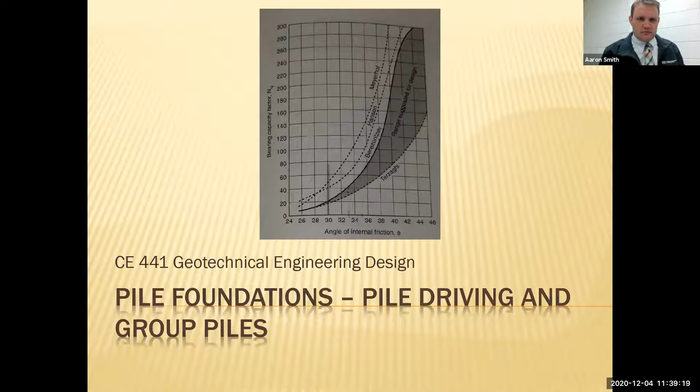So we've been talking a lot about how to figure out the bearing capacity, and hopefully bearing capacity of piles reminds you of chapter 3 when we talked about Terzaghi. Actually, let me stop this. Oh, look at this equation right here.

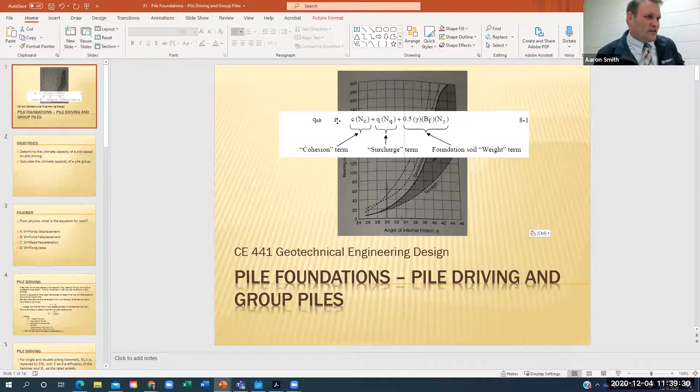Can you guys see this equation right here? Get that. This is one of my favorite equations. This is like from the father of soil mechanics. If you're going into geotechnical engineering, this should be your favorite equation. It tells you how much soil can bear, how much it can hold. It's made of 3 terms. It's Terzaghi's bearing capacity equation. It has a cohesion term, a surcharge term, and a foundation soil weight term. And each term, C is cohesion, but then each of these, N sub C, N sub Q, N gamma, everyone decided after Terzaghi invented this to add their own. So there's tables, there's ways, and you can figure this out. If you're just dealing with sand, of course, the cohesion term goes away.

BF, that's kind of the footing width. When it comes to piles, we use this equation, but we don't use all 3 components of it. If we're in sand, we knock out the cohesion component. And because the base of our footing is so tiny, it's just the diameter of the shaft, maybe 1 foot, maybe 2 foot. You can go up to 10 feet, but that's a big pile. We ignore this component, so essentially it's just Q, the surcharge, times some modification factor. And surcharge, again, that's just the unit weight of the soil times how deep it is into the ground. So the deeper you go in the ground, the more that soil's pressed together, it's tighter, and it can hold more load just because it's deep in the ground.

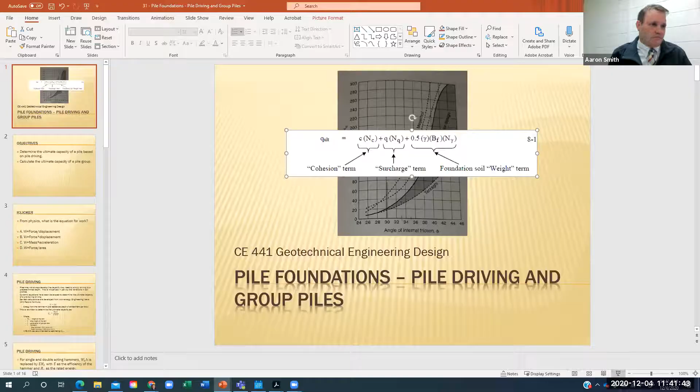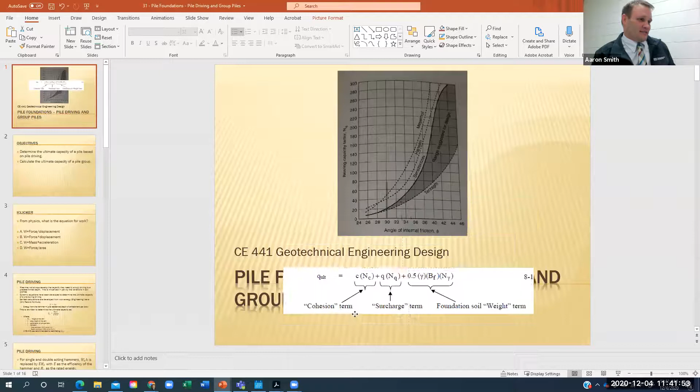Okay. Oh, dang, I covered the picture I really wanted to show. This. Okay, we've been talking about bearing capacity of piles, skin friction of piles. I just wanted to show this table right here because I found it was a good summary. Last time we talked about 12 different ways to calculate skin friction and 5 different ways to calculate bearing capacity of a pile. And here was just kind of a good summary.

If you're trying to find this NQ, the surcharge factor, here's a couple different authors, Meyerhof, Hansen, who knows how to pronounce that, Terzaghi. You just start with this table, you know the soil friction angle, and then you pop up, and then you come over and figure out this NQ factor. And who do you use? I don't know, but here's a good range. This is a range suggested for design. If you're a good engineer, you probably will not pop outside of this range.

So while there are many authors who have suggested these bearing capacity factors, if you stay within this range, if your N sub Q factors, based on your friction angle, stay right around these ranges, you'll be safe. Anyway, just wanted to share that with you.

There's more foundation books than the one we're sharing. There's probably 10 different foundation books. I was talking to my buddy who was working on his PhD at Virginia Tech, and I said, share me your notes about soil foundation. He had his book and his notes, and I was reading that, and none of his equations match the equations in our book.

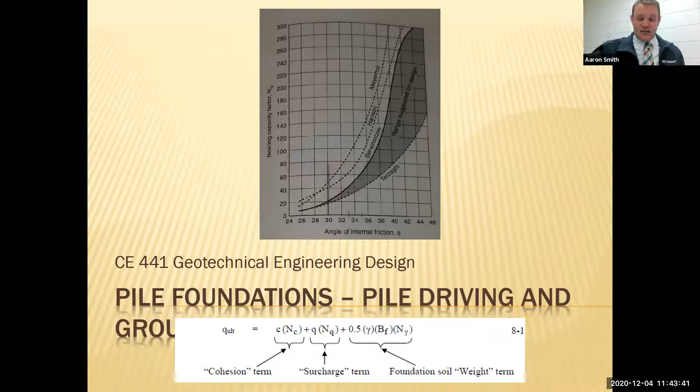He abridged all these plates. He had so many plates, and he had to choose the best. He saw our day, and then he picked the best pieces that would match the times that we were going to deal with. And Moroni and Mormon, they abridged all the plates. Well, that's what all these different authors do. Das, he abridged, and he found his favorite equations for calculating pile capacities or whatever. And then another book, he'll pull in his favorites. Anyway, there's lots out there. That's the whole point. But what doesn't change is the theory.

So the theory behind bearing capacity follows Terzaghi's equation. And what's the theory behind skin friction capacity of a pile? What are the three components that make that up? Who knows? Garrett, I'm calling on you out of the blue. Skin friction, what do you need to know to figure out skin friction? There's three general things you need to understand, two about the pile, one about the soil. What are they? There's the perimeter of the pile. Yep, got to know the perimeter. Length, the length of the pile.

And then, friction factor. Boom, friction factor. So that's the theory. You need to understand that. Now, friction factor, there's a million ways to figure that out.

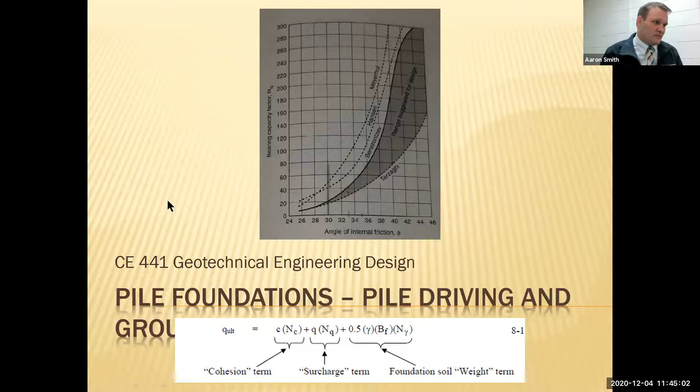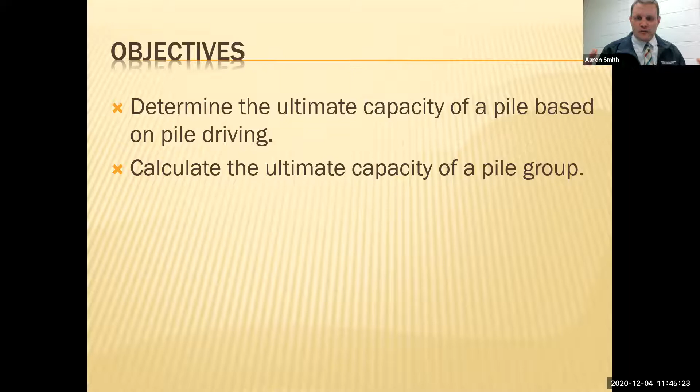And the site condition you're in can help you figure that out, and you may not know. So what you may need to do is go out into the field and investigate this with a test pile or something like that. So today we're going to talk a little bit more about how you can go out into the field and calculate the capacity of a pile based on in-field pile driving conditions. And we're going to talk about what happens when you have multiple piles and how you have a group, what's going on.

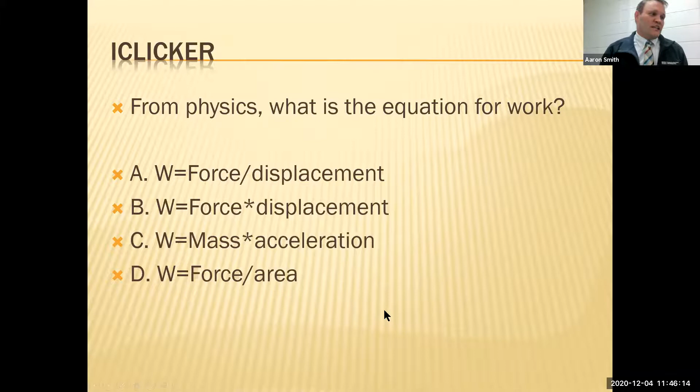That is correct. Work is force times displacement. So if you're a hammer and you hit a nail, the force of the hammer drives the nail in a certain distance. Well, good geotechnical engineers took this same concept out into the field, and they thought, if you're driving a pile in the ground, that's like work. That's like hitting a nail with a hammer. We could calculate how much work, and maybe we can back calculate work into some ultimate bearing capacity of the pile.

So if you're not comfortable using all these equations in the book, calculating your ultimate bearing capacity of your pile based off skin friction and end friction, what could you do? Well, you can go out in the field. And sometimes your calculations say, okay, I need to drive this pile 46 feet and it will be just right. But sometimes when you get to 46 feet, you don't have the capacity.

For whatever reason, your soil conditions were not what you thought they were. They may have changed, or you may not have had enough laboratory tests to adequately characterize or classify the soil conditions. Anyway, you're at a depth of 46 feet, but you don't have capacity. It's just going in the ground, acting too soft. So they wanted a method out there: if you got to the depth you thought you needed, but weren't seeing the kinds of blow counts, or it's still driving in too easily, you could keep driving the pile and weld onto it until you got to a depth where it was so dense it was barely being driven into the ground by the hammer.

And so there are equations that have been developed to determine the ultimate capacity of a pile during driving. So no calculations, this is purely field observations. ENR, Engineering News Record, has a formula, and it's all based on the work formula. This should look familiar: work equals force times distance. They kind of said energy from the hammer equals pile resistance times depth of embedment. So they modified this equation a bit more and said the ultimate capacity of a pile equals the weight of that huge ram times how many feet it's dropping, divided by the penetration per blow.

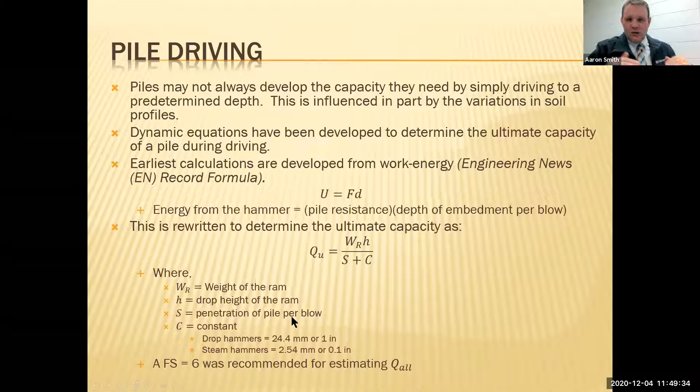But anyway, after all that's done, you can apply this whopping factor of safety of 6 to your Q ultimate, and that will be your Q allowable. So when you start seeing factors of safety of 6, that tells you engineers are doing what the military calls rear guard action — they're protecting themselves from future litigation. So factor of safety of 6 is what you divide this by. But you're able to now figure out penetration per blow, and you can rearrange this equation even more.

And anyway, this formula has been modified many times, but it's all kind of based on that formula of work.

So what it allows you to do is, and I've done this before, one of my first jobs as an EIT was to go out in the field. We were working by the Salt Lake City airport, which was based on old ancient Lake Bonneville.

So my job was to go out there and watch these 50 to 60 foot piles get driven into the ground, recording on a log how many blows it took to go each foot. At the top, one blow went like 1 or 2 feet. I was like, whoa, this is tough. As soon as it started getting deeper, it was taking like 50 blows to go a foot.

So we were getting some really dense sands down there. Then we said, okay, you can cut it off. The engineers had come up with bearing capacity equations and said, if you're at this many blows per foot, you can stop. That pile has adequate bearing capacity to go on to the next one.

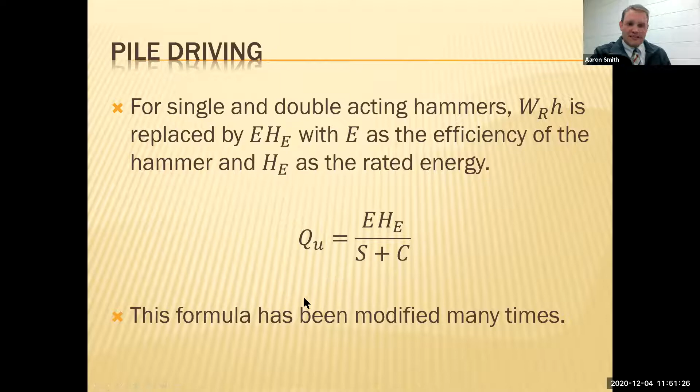So we did dozens of these. There were so many piles, they drove them all into the ground. There's formulas we can use based on the field data to know we've hit an adequate depth, we've got the bearing capacity we need, solely based off of the blow counts. But you need a couple pieces of information like about the hammer, the drop height, the weight, things like that. So there's a bunch of formulas to figure out this ultimate capacity.

So here's that equation we talked about, the modified Engineering News Record formula. There's the Danish formula, there's another formula, Janbu. Anyway, there's lots of formulas. That's just geotechnical engineering formula for you. But let's just look at this formula and break it apart right here.

It's saying the ultimate bearing capacity of a pile is equivalent to the hammer efficiency, and then WR times H, that is the weight of the hammer times the height that it's being dropped, divided by, we already talked about that.

We already talked about S is the blow counts, and the average penetration per blow count can be written related to the number of hammer blows per inch. So S, another way to write S is just 1 over N, the number of blows it takes to go 1 inch. And that's what C is, that modification factor.

Oh, here it is. You use 0.1 if the units are in inches, and then you use 2.54 if the units are in SI.

Okay, so then these are some new components to it. WR, that's the weight of your hammer. N squared, that's a coefficient of restitution between the ram and the pile cap.

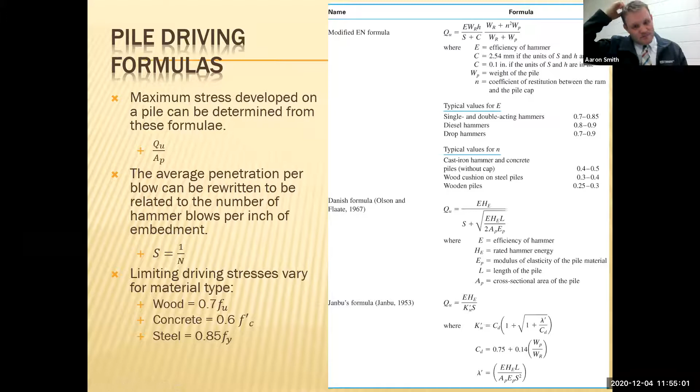And then they send an EIT out into the field. So that may be one of your first jobs, to count and verify that these piles have reached capacity. So not only was I counting blows, I was checking to make sure the piles were the correct batter, that they weren't tilted or leaning too much, and making sure they were practicing good welding techniques as they welded on the next branch of steel. Anyway, this is a neat way to do that. Any questions about this new way to figure out bearing capacity of piles?

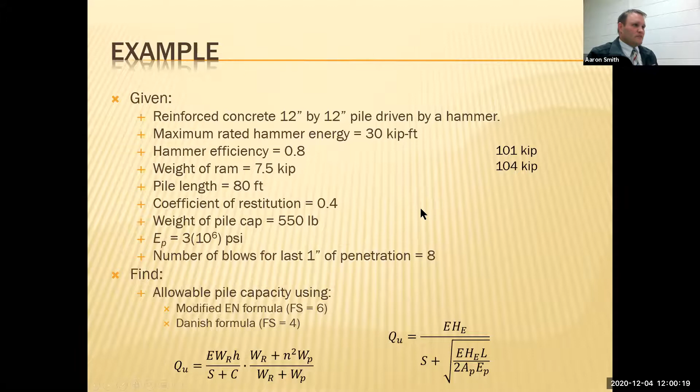So this is neat. All right, so the next question is, how else can you drive piles in the ground?

Well, you can vibrate piles in the ground, and so the amplitude can be calculated. They have these two weights that are rotating that cause the vibration. They're unbalanced, so it causes massive vibration depending on how fast they're being rotated. Then you increase the size or the static weight on these two eccentrically rotating wheels, and that creates the force of vibration.

So not only can you calculate the ultimate bearing capacity based on pounding a pile into the ground, you can also do it based on vibrations. But this is more used over in Asia or Europe, not very popular in the US. Why? Because there's not as clear an understanding of the relationship between load, rate of penetration, and bearing capacity when things are vibrating. You just don't get that same good feel.

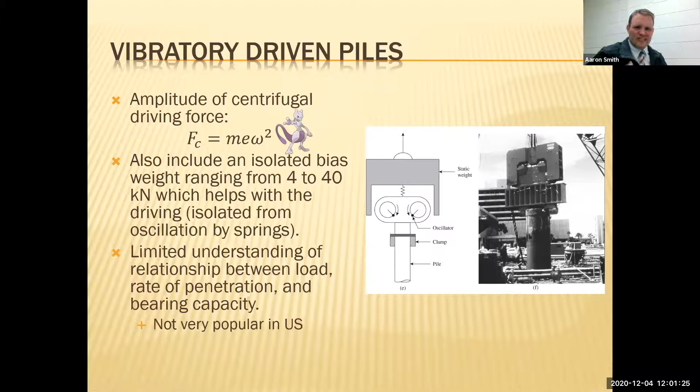However, there's an equation - if you have a vibratory type hammer, you can calculate the ultimate bearing capacity, but we're not going to really get into that. I just want you to know this is available as well. So if you don't have access to a diesel driving hammer and only have vibration, you can figure it out as well.

And of course, there are different folks who come up with different equations, like always.

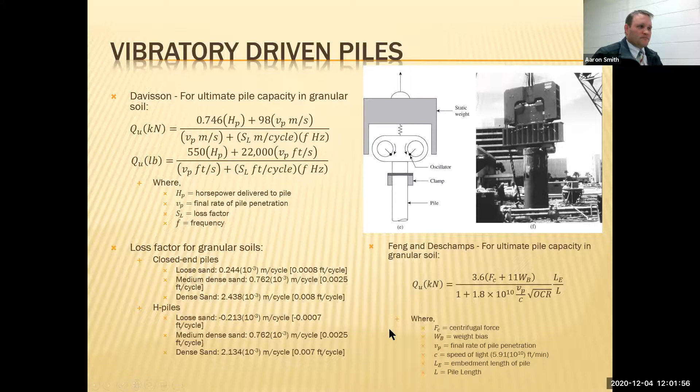All right, but this is where I do want to focus - this is going to be on the PE test for sure. You're going to have a question that asks you, okay, you know how one pile behaves. Maybe you can figure out the ultimate bearing capacity of one pile based on skin friction, bearing capacity, or blow counts. You'll probably have this depending on what test you take. I took the geotechnical PE exam, and it was focused heavily on questions like this.

So what happens when you have groups of piles, and how does that change the soil underneath? Does one pile, as you drive it into the ground, influence the second pile, influence the third pile? What if you had a group of nine piles, 3 by 3 by 3, and you drove the first pile in, second pile in, third pile in? What's going on in the ground right here? We know that when you drive one pile in the ground, it has a zone of influence that goes around it, and this picture explains it.

But when you drive a second pile in, sometimes those zones of influence overlap, and that could either be good or bad. It could be good if that zone of influence is densifying the soil. Say you had a loose sand, and as you were banging that pile into the ground, it densified the soil around it as it was displacing soil. Then when you put the second pile in, it densified that overlap area even more than the first pile.

Well, how could it be bad? What if you were in clay, and as you were pushing this in through clay, it was stressing that clay out? We all know that when you push on clay too much, at some point it's going to shear and slip along this sliding plane.

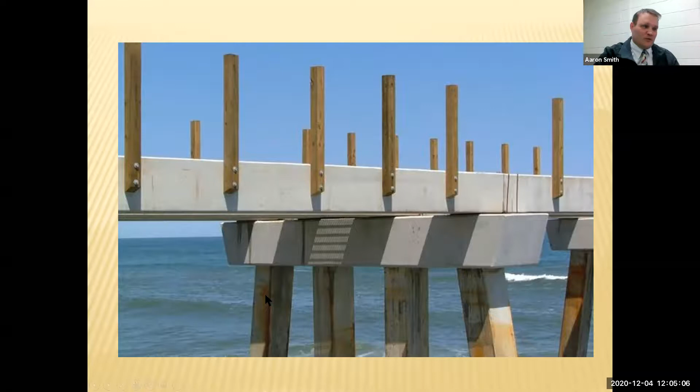Going back to this, the load bearing capacity when you have groups of piles is kind of complicated—people don't understand how it helps or hurts sometimes. A lot of research at BYU from the professor who teaches the foundations class there, Kyle Rollins, studies group pile capacities quite a bit. He's granted access to these huge diesel hammers and conducts experiments—he puts little pile groups together, then presses on them with giant hydraulic rams until failure. I just think that's really interesting.

So stresses carried from each pile to the soil will overlap when the piles are closely spaced. This could help or hurt depending on the soil conditions and how close you have these piles spaced. Your group of piles is notated as N1 by N2—in this case it would be 3 by 3, so N1 would be 3, N2 would be 3. If you see these values in an equation, that's what it is. L2 or LG is the total length of the pile, and BG is the total width of the pile.

And if you ever have an uneven number of rows and columns, say you had four columns and 3 rows, well then it would be 4 by 3. What one's L and what one's B? L is always the longer one. So in this case, L would be the length of all 4 of those spaced out, and BG would be the length of the 3 rows. We'll see these kinds of notations in a minute—I just want to make sure that's clear.

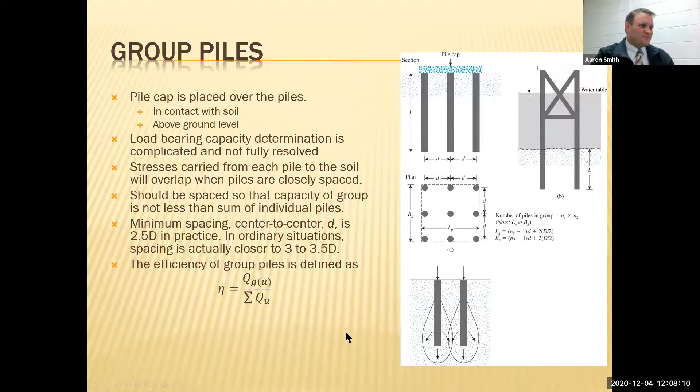We can figure out this value right here, which represents the efficiency of a group of piles. So we can calculate what that efficiency is with this kind of complicated equation, but it's not too complicated. Use those values that we just talked about.

N1 is just the number of piles that you have. In this case, it would be 3. N2 would also be 3. And you can figure out the efficiency of your pile. P, we know what P is - that's the perimeter. L is the length. F, that's friction, we've talked about that before.

Groups of piles, they can help you, they can hurt you. So how do we figure this out? Well, the approach is a 2-step approach. We first have to look at it as a giant block, and then we have to look at it individually, and then take the lowest value of those two.

So when it comes to group piles, the first thing you look at is like one solid giant pile that has a perimeter of BG and LG, and you calculate it as one huge pile. What if that pile was just one giant pile? What would its ultimate bearing capacity be?

And we're just talking about friction piles here. When it comes to friction piles, you just have those 3 components that we talked about earlier. When I picked on, I think it was Garrett, he said friction piles - it's the perimeter, it's the length, and it's the friction between all of those. That's all you need to know.

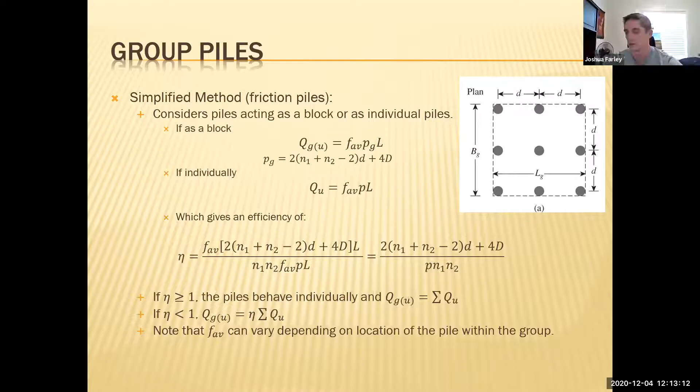But how many soil types could the skin friction be going through? As many as there are. You could have 2 layers, you could have 20 layers. So one thing to remember about these equations is when you're trying to sum up this F average, if you have multiple different layers of soil and each soil has a different friction between that steel or that concrete pile that you're putting in the ground, you need to sum them up individually. That's just one important thing to remember.

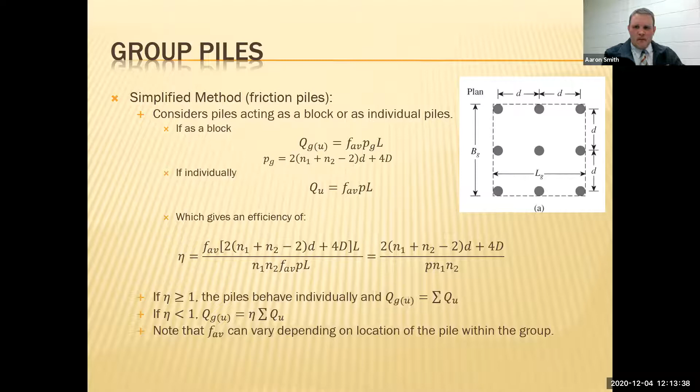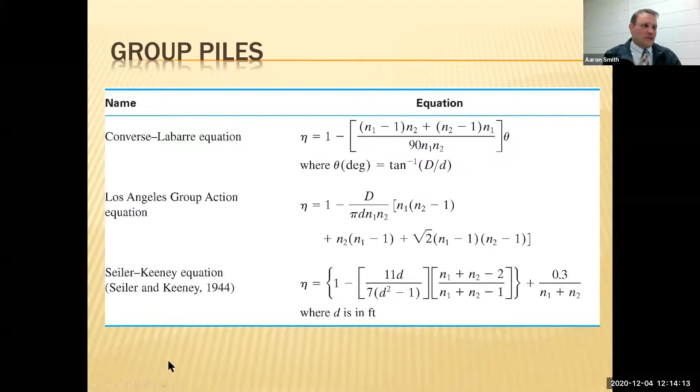So there's a couple different equations to figure out if your piles are efficient or not. The only thing to know is if this pops up on the PE test or in industry when you're working, there's just multiple equations for everything. I'm just showing you these so you know there's not just one set way to figure out efficiency, but they're all based off pretty much the same things. How many piles do you have? How many columns, how many rows, and you can figure out the efficiency of the group or not.

And when it comes to clay, who remembers Meyerhof's bearing capacity in clay? We talked about it last class. Does anyone remember that off the top of their head? Wasn't it 9 times the area of the perimeter times the cohesion? Close. Speak up, Brandon. Wasn't it 9 times the area of the perimeter times the cohesion? Yeah, that's right. So we're talking about bearing capacity. It's 9 times the area times the cohesion of the clay.

So when you're in clay, you can calculate the bearing capacity based off of Terzaghi's equations, but Meyerhof simplified it for us. When you're in clay, you could have QP equivalent to 9 times the area times CU. And so the ultimate capacity of a group of piles is you take how many you have. In this case, we have 5 times 3, we have 15 piles, and they each have the ability to hold some load at their base, at the bearing end, tip, and then they have some skin friction. So the ultimate of that whole group is going to be equivalent to N1 times N2, which is 15 times 9 times the area times the cohesion of that clay, and then it's going to be the sum of all the different layers of soil that we have.

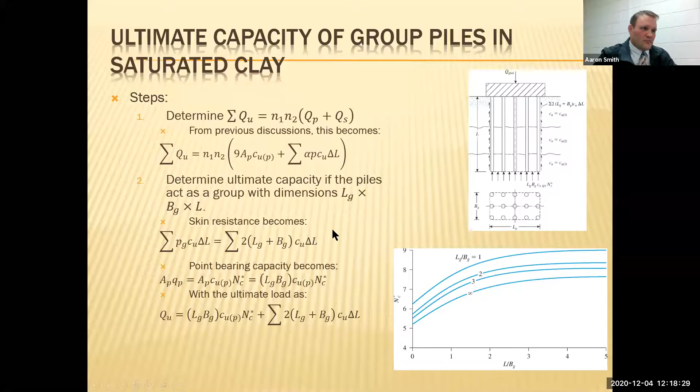And then it has a certain bearing capacity. That equation we showed at the very beginning, Terzaghi's equation for bearing capacity, had a bearing capacity factor of N sub C in it. So there are some charts we can use to figure that out.

If we know our length to base ratio, LG divided by BG, we come in here. In this case it's probably like 1.5. We choose which ratio line to come up to, find that same line, 1.5, L over BG, come up and over, and our N sub C factor would be somewhere around 7.5 or so. So there's 2 steps.

You have groups of piles. First figure out how much load the 12 piles could hold. Then figure out how much, if this was one gigantic pile, that skin friction would hold up with this giant perimeter. And how much that load being transferred down to this layer right here would be your bearing capacity for tip resistance.

You compare those two to each other, and see which one is lower, and that's the one you use. So group piles, 2-step process. Any questions about that so far?

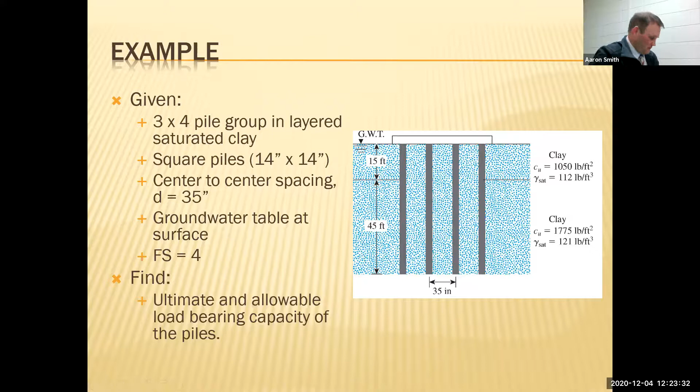How many equations are in chapter 11? I'm just curious. It's up to 131. I don't think I've ever had a chapter in my school career that had 131 equations in it. So that will be your challenge on the test - as soon as you see a question, you're just like, which one of the 131 equations do I use? But the good news is the questions will guide you to what to use. If it's in clay, that gets rid of half the equations, because half are for clay and half are for sand.

I'm just looking at the book, trying to point out anything that jumps out at me that's not straightforward, because equation 11.121 labels everything - it has N1, N2. We pretty much cover everything, there's nothing new that will jump out at you. You should be able to, when given an example like this, find it quite straightforward.

Something I don't know, because I already started working on the homework - where do you find the equations for LG and BG? Okay, so LG and BG, let's go look at that.

Okay, so LG and BG - L is going to be the length to the bottom of the pile. So in the problem we were on, L would be 45 feet plus 15 feet, so that's 60 feet. But LG is the length of the piles spaced all out. So LG would equal, in this problem, 4 times 35 inches, because that's the space between each one. Does that make sense?

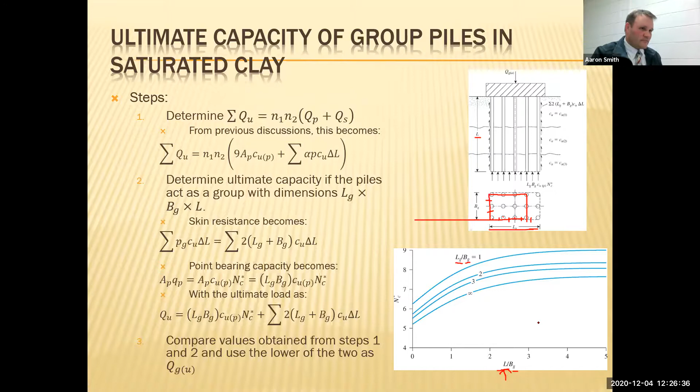Okay, well that pretty much wraps it up for group piles. There's still kind of a lot that we didn't get into - one thing we didn't cover is what happens with settlement when you have a group of piles. What happens is you put some load on this pile right here, and settlement doesn't just happen like... it doesn't just pretend, oh man.

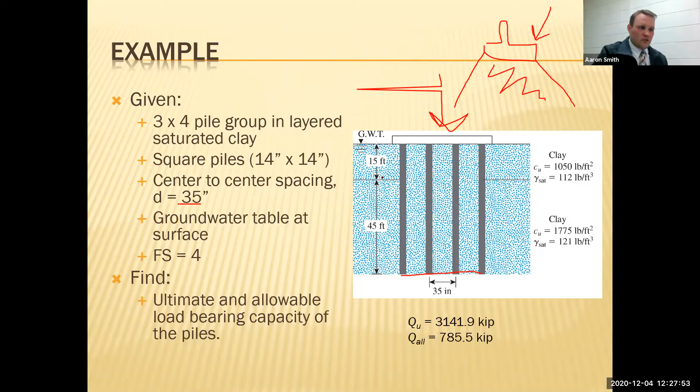I want to mention this because I had a question like this on the PE exam - estimate settlement for this group of piles. With a group of piles like this, with a load right here, you'd think, well, if you had a footing shaped like this, the footing disperses the load through the soil, and all this soil settles and consolidates - there's equations to figure that out. So on a pile group, do we just take this area and treat it like a footing, figure out the load from above translates through the soil like this, and calculate the settlement right here? But if you think like that, you'd be wrong. That is not what happens with a group of piles.

Instead, what happens - and I'm sure you'll see this again - is that you come down 2/3, and 1/3 from the bottom of your piles is actually where the ground starts to settle and feel the load. So it's from this point out that you need to calculate your settlement. Whatever load's coming down here, you start calculating the settlement at this point, 1/3 from the bottom of your pile, 2/3 from the top, and it creates this soil pressure distribution going down through the soil at a 2-to-1 slope.

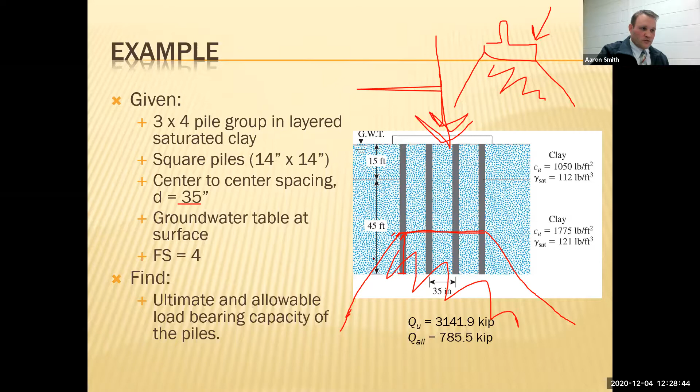Anyway, that's important to know. We don't have time to cover it right now, but I wanted to bring it up - if you read the next chapter in the book about elastic settlements of group piles, you'll see in all the pictures this cone of stress being pushed into the soil, from 1/3 from the bottom, 2/3 from the top. That's where you calculate, and that's what's going through the ground. That's how you calculate settlement from there.

Because there's always two parts to the equation. We've been talking about bearing capacity - is the ground strong enough? Well, maybe the ground's strong enough, but it settles 4 inches. And if your client doesn't want his tower tank to settle 4 inches, then settlement will control. Maybe the ground could have held up that weight, but the settlement to get to that weight was just not tolerable to the client.

Some clients are okay with 4 inches of settlement - they just build everything and it all kind of settles 4 inches, and none of the tanks are connected to each other, so who cares if they settle? Well, sometimes they are connected with pipes and lines. And if you have a line going into a liquid nitrogen tank and it settles and breaks, that would be a problem.

We mostly cover bearing capacity in this class, and probably the test questions will focus on bearing capacity, but just know that there's settlement always in the background that may control as well.